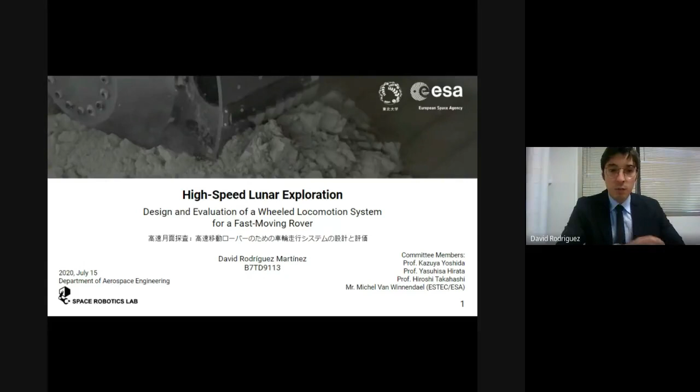For today's presentation, I'm going to start by briefly answering two questions: what and why? What are the challenges associated with lunar locomotion, and why is increasing speed a relevant problem to solve for robotic exploration of the moon? Then I'll explain what we know about faster off-road locomotion, both here on Earth and on the moon. This broad introduction will allow me to present the highlights of my work in the two main areas comprising locomotion, which are traction, that will be chapter 3, and suspension performance in chapter 4.

Using all this experience and these new findings, in chapter 5 I'll present the design of a new rover prototype intended for faster lunar mobility studies. I'll end this presentation with a summary of the main contributions of my work to the topic of rapid lunar locomotion.

So let's start with what's the problem with lunar mobility and why we need robots capable of moving faster. If we strip the tasks a planetary robot or rover has to perform down to the very basic, it would be to get from point A, usually a lander, to point B. Now yes, there are many experiments to be conducted and measurements that need to be recorded in between those two points, but really there will be no mission for these robotic scientists without the capacity to travel.

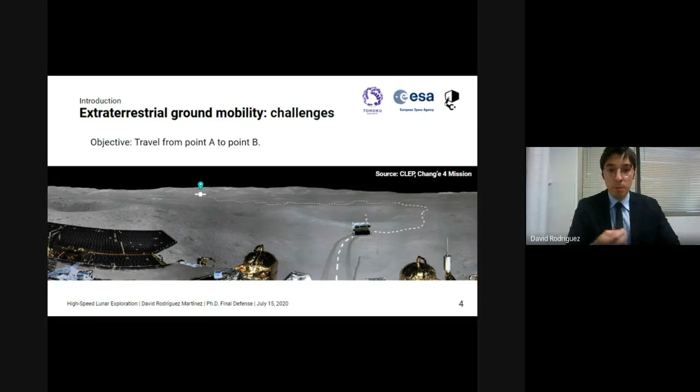And it is exactly in this apparently mundane task where some of the most challenging problems lie. My goal for this project has been to understand the effects of moving from A to B at speeds that approach 1 meter per second, and to develop solutions to make that journey possible, successful, and safe. For that, I needed to understand the effects of increasing speed on the two aspects I mentioned before: traction and suspension performance. But why is this type of study a challenge?

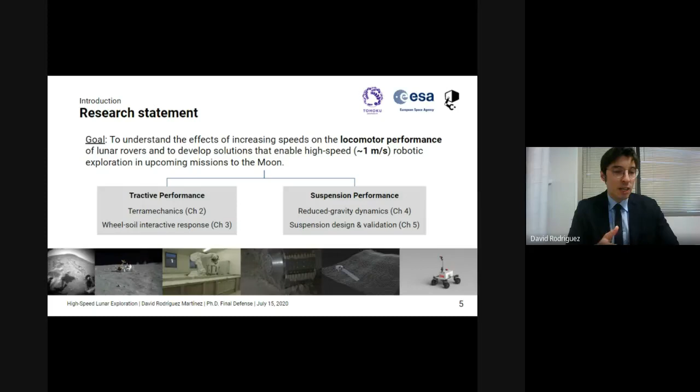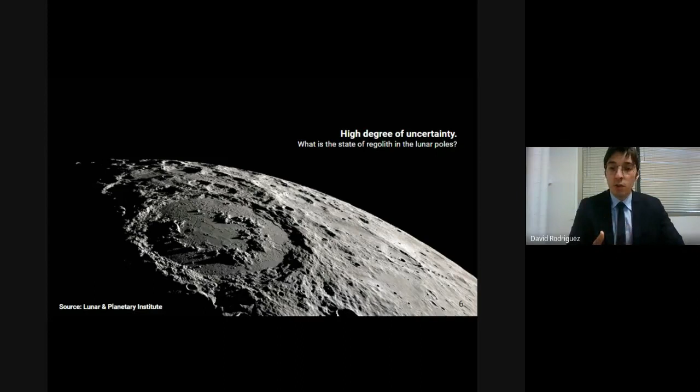Well, I've identified 3 main reasons why that's the case. The first is that exploration is by nature characterized by a high degree of uncertainty. In the case of the moon, for instance, information is quite asymmetric or non-homogeneous. We don't know whether the state of polar regolith, for example, would resemble that of the equator, given the lower temperatures and less severe thermal cycles of high-latitude regions.

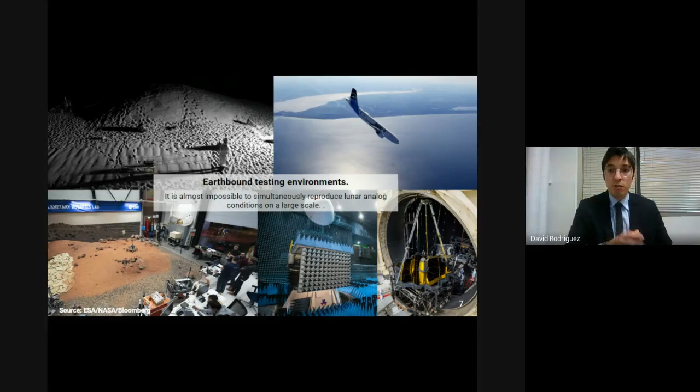The second reason lies in the impossibility to simultaneously reproduce and test on Earth the full scale of environmental conditions robots will experience during a mission. This is particularly relevant for high-speed locomotion, since the gravity scaling technique used to test planetary rovers here on Earth, by which lunar weight is simulated by degrading the mass of engineering models, cannot be used once inertial effects and dynamics start to dominate the behavior. So verification and validation across different gravity fields prior to a mission becomes increasingly difficult.

This brings me to the third problem associated with extraterrestrial ground mobility, and one of the major topics of study in my work, which is the complex nature of interaction with soils. I'm sure you've seen this sequence of images many times of NASA's Spirit rover desperately trying to free itself from a bank of unconsolidated sand. The challenge here is that we are still working toward the understanding that allows us as engineers to develop tools to predict the outcome of these interactions, to avoid precisely what happened to Spirit.

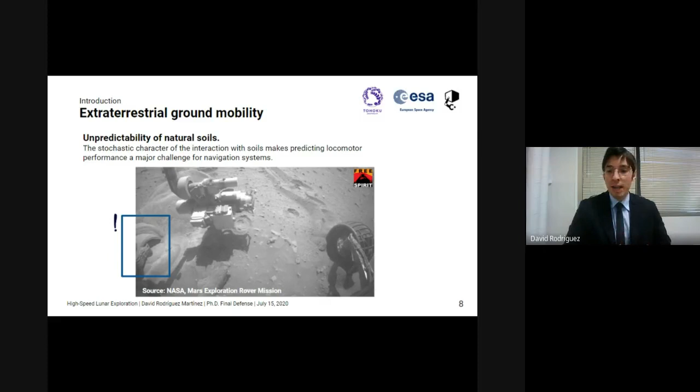So with all these constraints already present for rovers whose speeds rarely surpass 5 centimeters per second, like those on Mars, why consider developing robotic systems capable of traveling 20 to 100 times faster in an environment like the moon, where gravity is just a sixth of Earth's?

But why is that? Well, the lunar poles have become the most sought-after regions of the moon by governments and private corporations, due to their scientific value and the potential richness of their resources, primarily water ice and other volatile compounds.

In the poles, the sun barely rises above the horizon due to the low obliquity of the moon, making illumination conditions very challenging for navigation systems. Also, in some of these regions, the window of exploration is linked to just 7 days of sunlight per month, and there is a high percentage of areas kept in complete darkness, what we call PSRs, or permanently shadowed regions, where a higher amount of these valuable compounds are expected to be found or trapped.

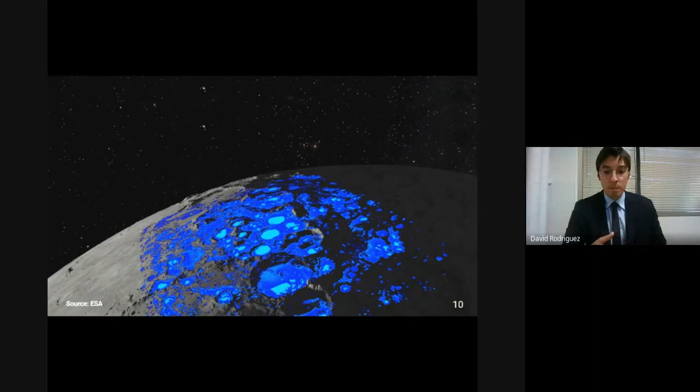So if we combine shorter days, the lack of sunlight, and longer traverses like this 37-kilometer journey, with two particular goals: one, the maximization of the return on investment for the mission, be it scientific or commercial, and two, the avoidance of heavy nuclear decay units—then faster locomotion becomes a potential enabler for these missions, getting in and out of shaded areas and simply getting to those sampling points as fast as you can, so that more time can be devoted to the science.

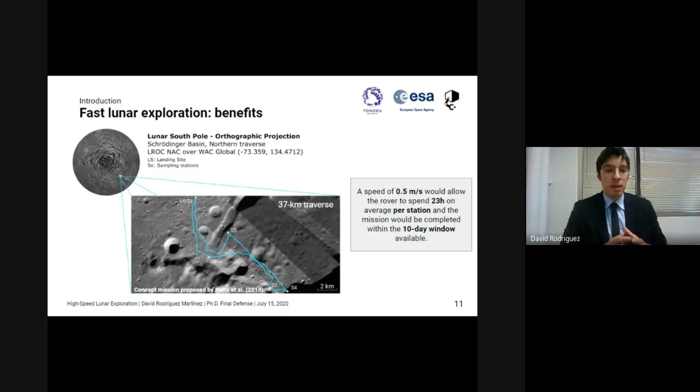In this study in particular, the authors estimated that a speed of at least 50 centimeters per second would be necessary for the mission to be completed within the 10-day window available, while allowing enough time for the scientific task to be conducted at each sampling point.

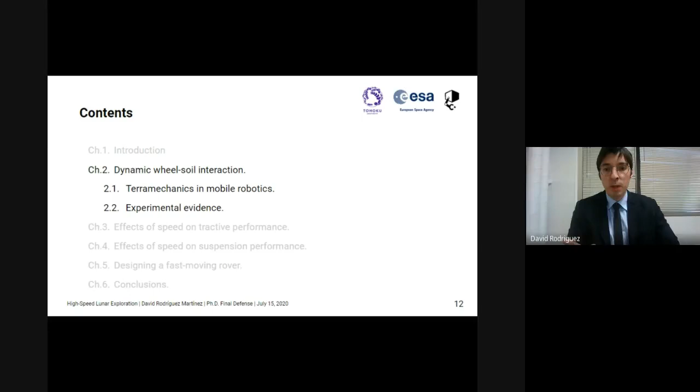So now that we have an idea of the challenges lunar locomotion studies face, and why upcoming missions, specifically those targeted at the poles of the moon, may require faster rovers, the next aspect we need to look at is: what do we know exactly about what it takes to move faster on the moon? It is imperative that we first turn our attention to terramechanics.

Terramechanics is the branch of science devoted to the study of the interaction of vehicles and machines with soils. One of the theories most widely used within the realm of off-road locomotion has come to be known as the Bekker method. It's a simplified, closed-form, semi-empirical model used to predict the vertical loads acting on the soil as a result of the movement of a large wheel.

This model has been expanded by many authors, including Wong and Reece, giving rise to the two equations you see on screen: the pressure-sinkage and the shear stress-strain relationship. The important thing I'd like to focus on here is not necessarily the equations, but the fact that this theory, initially meant for tanks and big military trucks driven across muddy ground, has now been applied to planetary robots orders of magnitude smaller, lighter, and slower, operating on soils with close to no, as far as we know, organic matter.

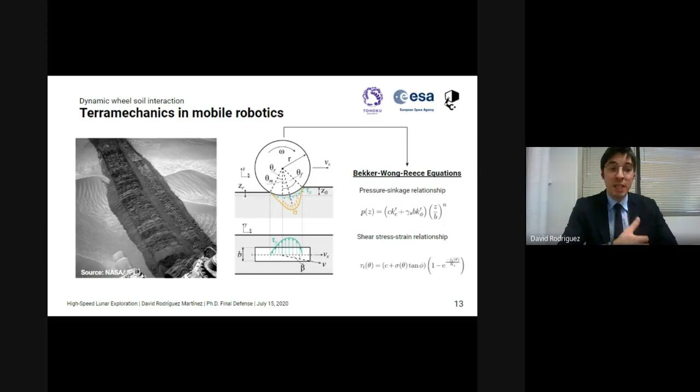So predictions through these equations are not necessarily our best chance at understanding the problem and predicting the outcome of robotic mobility and lunar locomotion.

Some of the most important limitations of Bekker-based models include the lack of information as to the physics taking place in the interaction with soils, and the need to perform an experimental characterization of the state and properties of the soil on which the rover will ultimately operate. As you can imagine, this dependency on empirical data hinders the validation of these models, particularly in the case of planetary exploration, where data is often scarcely available.

Also, its bidimensional representation and the oversimplification of the wheel geometry and terrain is a big limitation. But for our case, the biggest disadvantage imposed by the use of Bekker-based equations resides in their inability to account for dynamic effects. We know already, from studies conducted in the field of soil mechanics, that pressure and sinkage are affected by the rate of penetration—they are affected by dynamic effects.

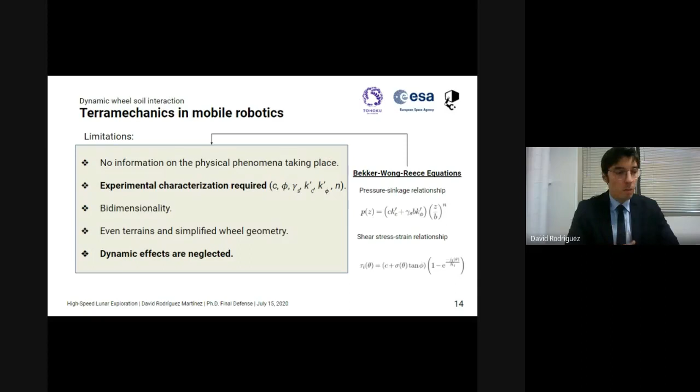The Bekker model, and those based on it, assume the interactions of wheels and soft ground occur under quasi-static, steady-state conditions, making these equations independent of the potential effects caused by soil strain rates, inertial effects, or transient operations. But what about evidence from previous missions to the moon?

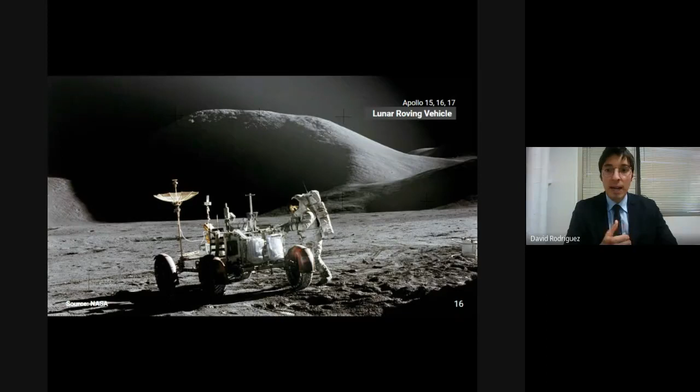We've already been to the moon with rovers way faster than today's Martian rovers. Two missions, the Soviet Luna 17 and 21, featured Lunokhod 1 and Lunokhod 2, a pair of 800-kilogram, 8-wheel rovers remotely operated from Earth with a top speed of 50 centimeters per second. And of course, the last three Apollo missions featured the well-known lunar roving vehicle, a piloted lunar vehicle capable of traveling at speeds of up to 5 meters per second.

Unfortunately, neither of these two vehicles carried sufficient telemetry on board for us to derive definite conclusions as to the performance of these vehicles when moving faster under lunar conditions.

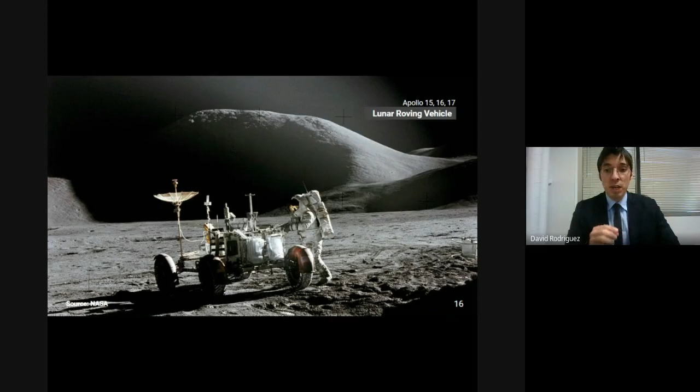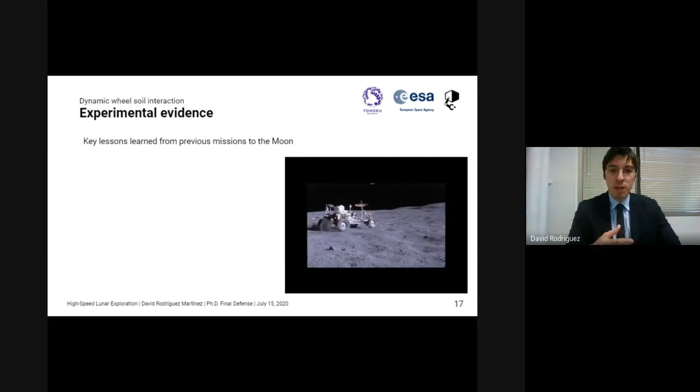By looking at the footage and closely examining the post-mission reports, we can extract some key lessons. One of the first things that becomes evident from the Apollo footage, and which the crew remarked on in their reports, is the tendency of the suspension to constantly bounce. These instabilities became prominent at higher speeds, preventing astronauts from driving above 2.8 meters per second, with the wheels reported to consistently lose contact with the ground above 1.4. This excessive bouncing decreased traction, reduced stability on slopes, and diminished the capacity to brake and turn, with braking distances almost twice those required on Earth.

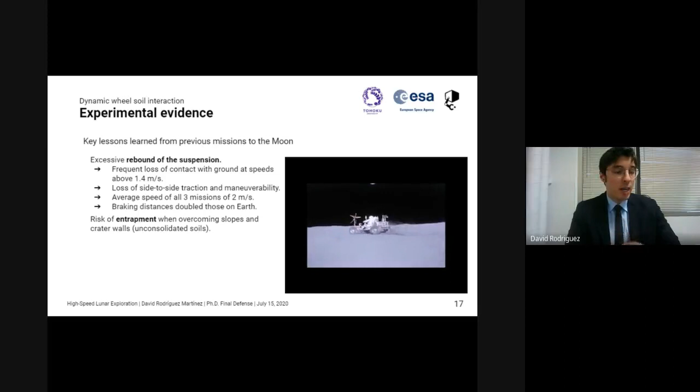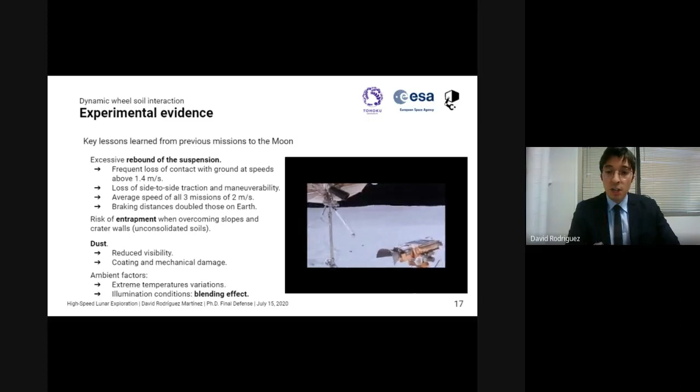All of this limited the average speed of the three missions to about 2 meters per second. As with unconsolidated Martian soils, wheel entrapment was also a major concern, primarily when overcoming slopes. Other aspects, less relevant to our studies but equally important, were dust and ambient lunar factors: freezing temperatures, harsh illumination conditions, and the lack of contrast and blending of the horizon with surrounding obstacles, which made operating these vehicles at high speed ever more complex.

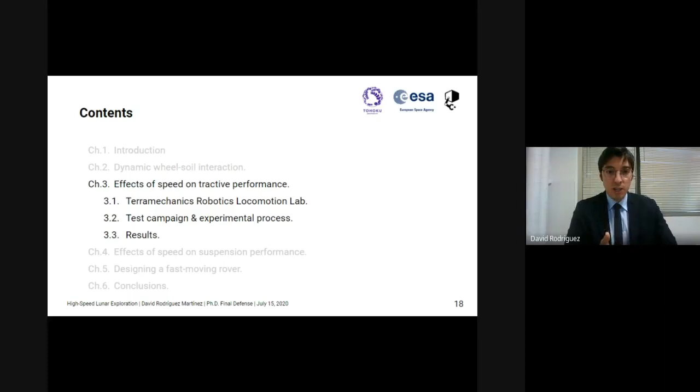In light of the inconclusive evidence on the locomotor performance of planetary robots operating at higher speeds, the first thing I tried to understand was how speed affects traction. For this part, I had two main objectives. First, I wanted to understand how speed was affecting tractive performance metrics, namely rover pull, wheel sinkage, and tractive efficiency.

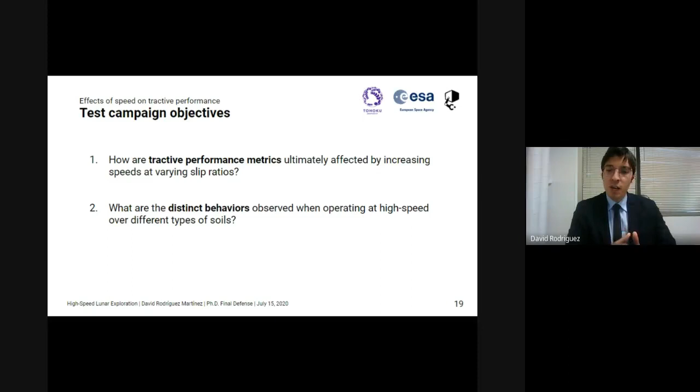Second, I wanted to obtain numerical and visual proof of the variations in the dynamic interactive behavior when operating over different types of soils.

To conduct these experiments at speeds up to 1 meter per second, I partnered with the Institute of System Dynamics and Control of the German Aerospace Center, where there is an ambient-controlled automated facility called the Terramechanics Robotics Locomotion Lab. This facility, unlike conventional single-wheel testbeds, makes use of an industrial robotic arm and an extensive sensor suite, which we used to constantly monitor the performance of the wheel over a run distance of 3 meters.

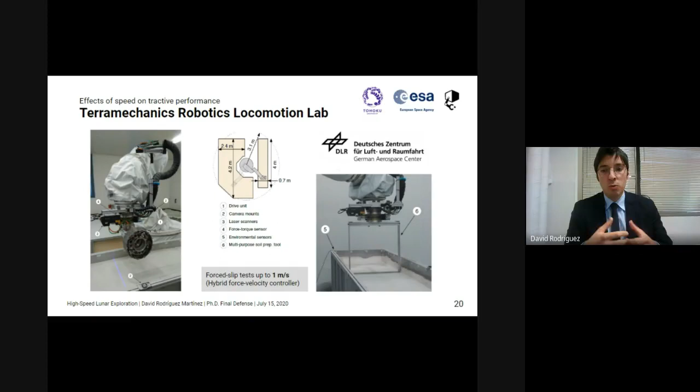A hybrid controller was used to vertically impose the required wheel load and to control the speed of the robotic arm longitudinally, allowing us to recreate varied slip conditions. Here you can see the two end effectors we used. The one on the left contained the drivetrain, which is what we used to operate the wheel, and the second one on the right was used to condition the ground before every experiment.

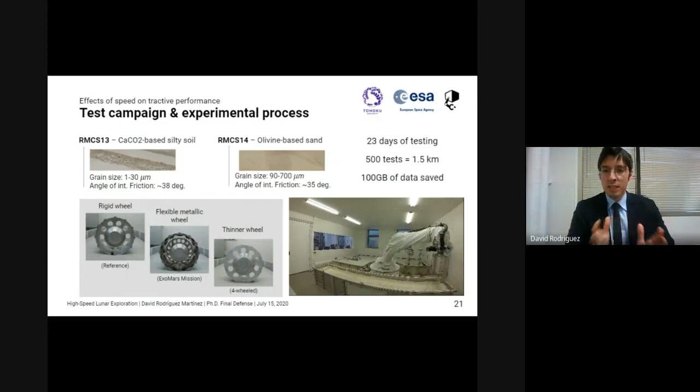We conducted 500 different tests, collecting, as far as I know, one of the most extensive data sets that exist to this day on the effects of speed on tractive performance for non-pneumatic wheels. We operated different types of wheels commonly used by planetary rovers over two different types of soils. For most tests, we used a cohesionless olivine-based sand, codenamed RMCS 14, and we also tested performance over a more challenging soil named RMCS 13, a calcite-based silty soil, very fine-grained, soft, and slightly cohesive.

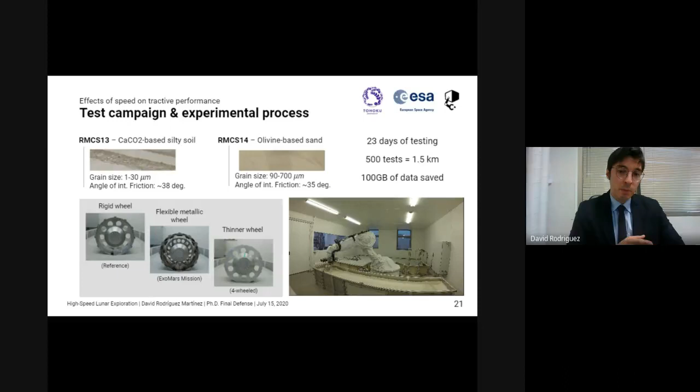For every case study, the speeds tested went from 1 centimeter per second to 1 meter per second, and these were all forced slip tests. For all of them, we used a wheel load of 100 newtons.

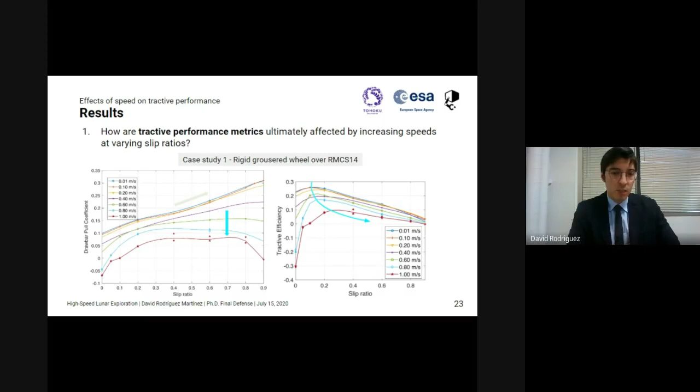The second interesting observation, if we look now to the right side graph, is the tendency of the slip ratio at which maximum efficiency was reached to increase with increasing speeds. At low speeds, maximum efficiency was often reached at 10% slip, whereas at 1 meter per second, the maximum efficiency was recorded to be reached at almost 30%.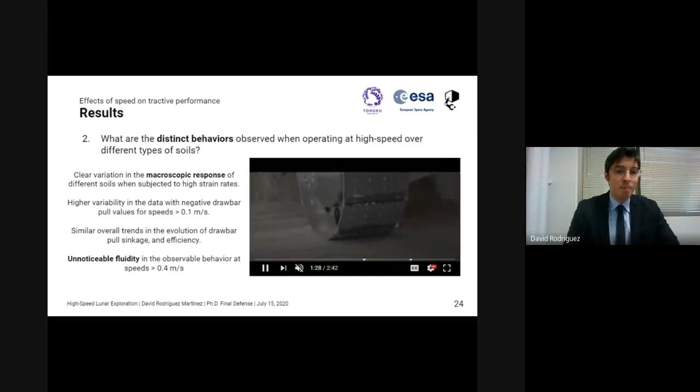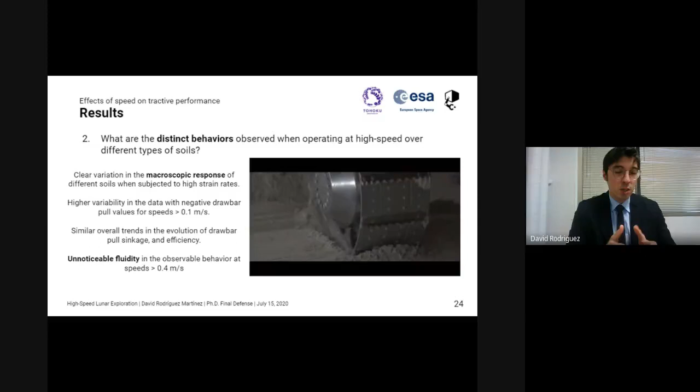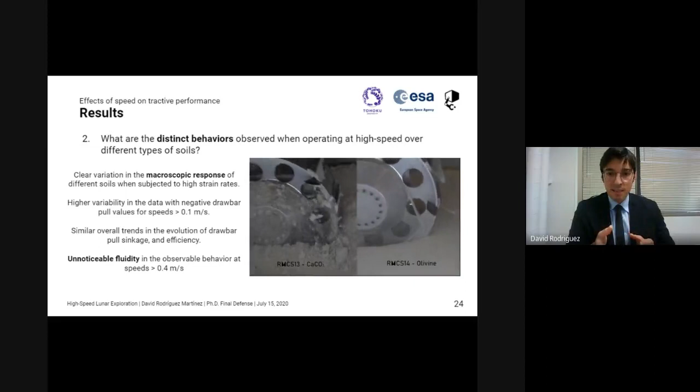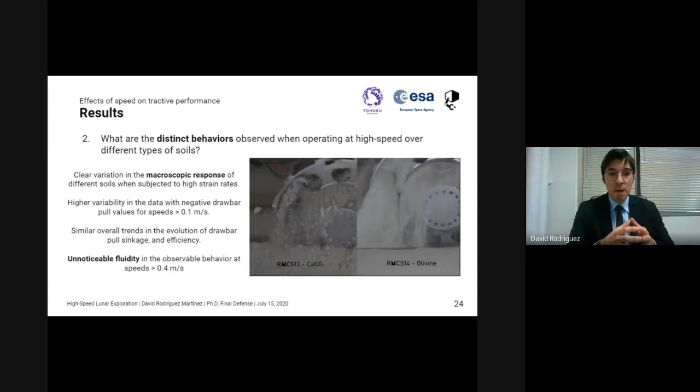With regards to the variations in the dynamic interactive behavior, it was much harder to manipulate and drive over the finer and slightly cohesive calcite soil, which is the one you can see in the video now. Above 10 centimeters per second, we experienced almost a complete loss of traction due to the low bearing capacity of the soil. As you will see in a few seconds, the macroscopic behavior of the different soils we used show clear variations. The olivine-based sand, on the right side of the video, displayed an increased fluidity when subjected to high strain rates, something that was not observed in the calcite, with bulldozing effects being much more predominant in this second case, as you can see here.

And lastly, the flexible wheel displayed the best performance along the full range of velocities. Measurements recorded at 1 meter per second with the flexible metallic wheel displayed over 2 times higher drawbar pull and tractive efficiency, and about 18% lower sinkage at 20% slip, compared to a rigid wheel of similar characteristics.

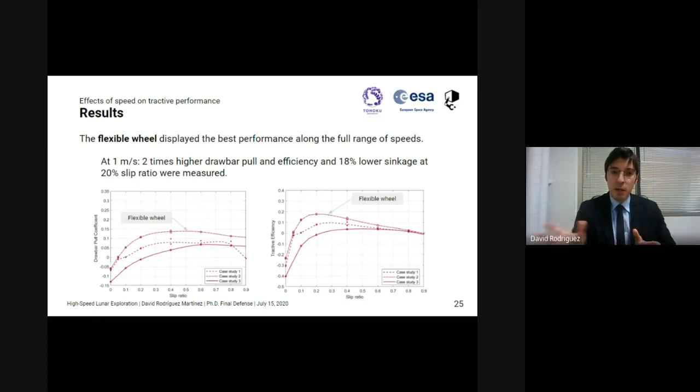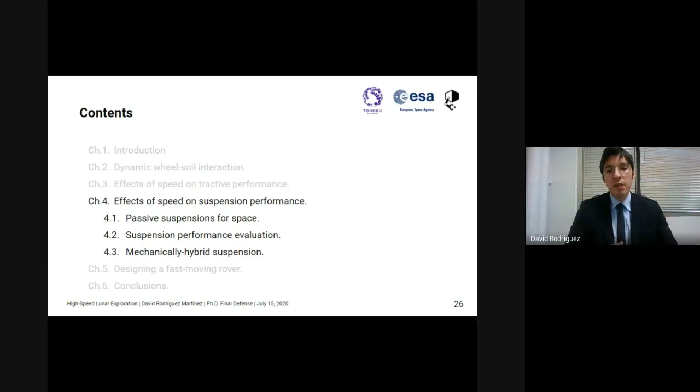So once I understood how speed played a role in the tractive performance of rovers operating up to 1 meter per second, the second aspect I was interested in was the effects of speed on the suspension performance. The core premise for an optimal suspension design in planetary robotics is that it has to be mechanically simple and potentially passive. Most planetary rovers make use of a passive free-balancing suspension configuration similar to this one.

This is called the rocker bogie suspension, initially designed by NASA for Sojourner during the Mars Pathfinder mission, although Sojourner had it reversed, with the bogie in the front.

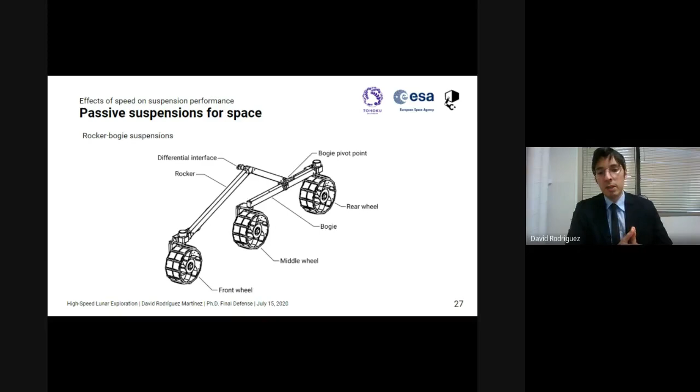The simplicity of passive suspensions becomes almost a necessity in space, given the limited volume and power budget of space activities. The dependability of these suspensions makes them great for obstacle negotiation, terrain compliance, and vehicle stability at very low speeds, but not so much for mitigating impact loads and vibrations and maintaining proper stability of the rover at higher speeds.

So in order to understand the limitations of passive suspensions when applied to smaller four-wheel rovers operating at higher speeds, I needed to turn to multi-body dynamic simulations, where in combination with high-fidelity physics engines, I could actually observe and monitor the dynamics under a virtually simulated 1G environment.

To develop the different modules that I required for my research, I decided to make use of a commercial software called Virtual Robot Experimentation Platform, or VREP, although recently it has been renamed CoppeliaSim, in combination with the dynamic physics engine Vortex.

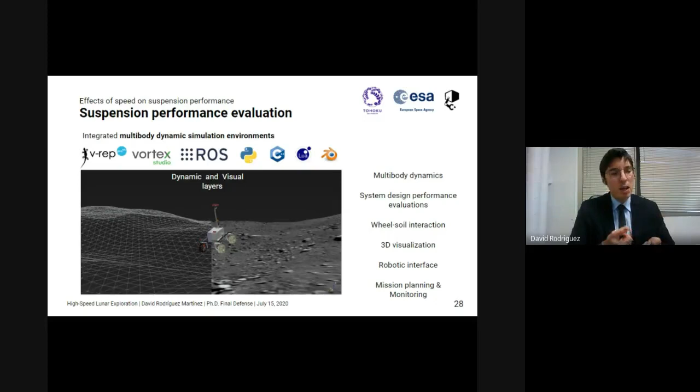So using this platform as a baseline, I developed four different simulation modules to simulate extreme situations the lunar rover will encounter once on the moon. This included traveling at 1 meter per second when overcoming large rocks, climbing steep slopes, or suddenly encountering an outcrop.

To simulate the frictional character of lunar regolith, which is often the most complicated part to simulate accurately, I opted for a simple Coulomb friction model with an isotropic friction coefficient of 0.4 for the interaction between the wheels and the soil. This provided a range of slip ratios between 5 and 35% for these situations. I knew this was an oversimplification of the real situation, but it was a trade-off I needed to make in favor of shorter turnaround times in the simulations, also knowing that I would compare all the different models against the same simplified baseline.

And then what I did is model a multi-body dynamic system of a rover we had in our lab at the time called Eldorado 2, which is the rover you can see in these images, a 4-wheel, 19-kilogram rover with passive rocker arms and rigid wheels.

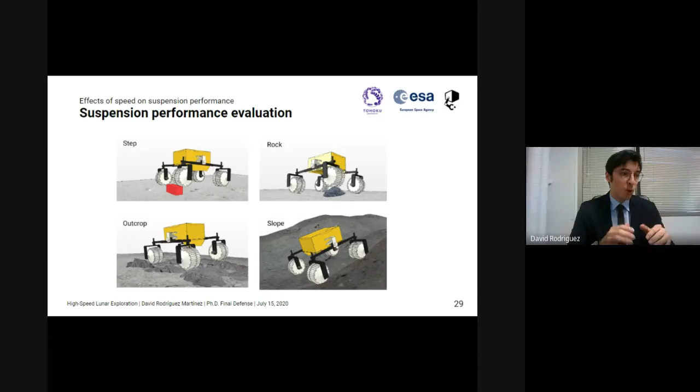So what I wanted to observe was the variation in performance when energy dissipation devices, in this case passive springs and dampers, were introduced in the design under different suspension configurations. Using the same mass distribution, sizes, and suspension layout, I defined 3 different configurations.

A conventional dependent rigid configuration, which simulated the use of free balancing rocker arms. An independent elastic configuration, in which the rolling of the rocker was locked and a spring damper system was introduced between the wheel hub and the end of the rocker arms. This configuration simulated the double wishbone we use sometimes in ground vehicles here on Earth.

Lastly, I devised a new configuration in which the previous 2 were combined into what I named mechanically hybrid suspensions. The performance was evaluated in terms of success in overcoming the obstacle or the slope, maximum vertical load to the suspension arms, and maximum vertical accelerations measured in the chassis.

Unfortunately, I don't have enough time to go over every single case. I'm going to showcase one of the most extreme cases, which was suddenly confronting an outcrop at 1 meter per second. So if we pay attention to the videos on the right side, you can see the violence of the situation.

When we simply use conventional rocker arms, the wheels lose contact with the ground, and we almost completely lose control of the rover trajectory. There is a high risk of damage, not only of the wheels and the suspension arms, but also of the electronics and the optics housed inside the main body of the rover.

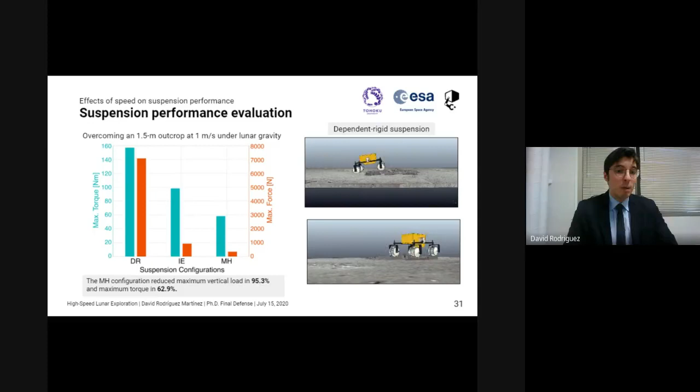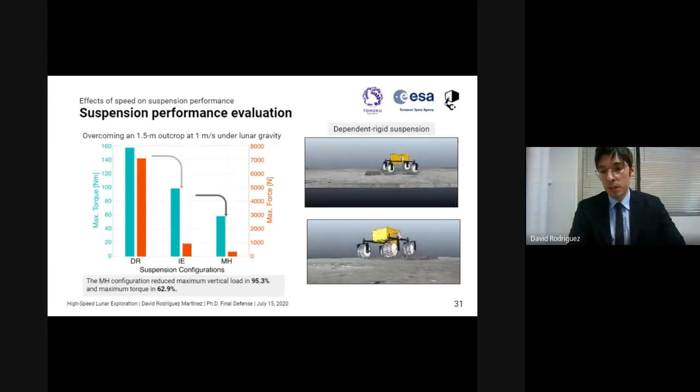If we look now at the graph on the left side, simply by adding springs and dampers we already substantially decrease the effects of impact loads. But if on top of that we introduce a dependency with the MH configuration, we achieved a 95% reduction in maximum vertical loads and almost 63% reduction in torque when compared to the dependent rigid case. And here you can see the difference.

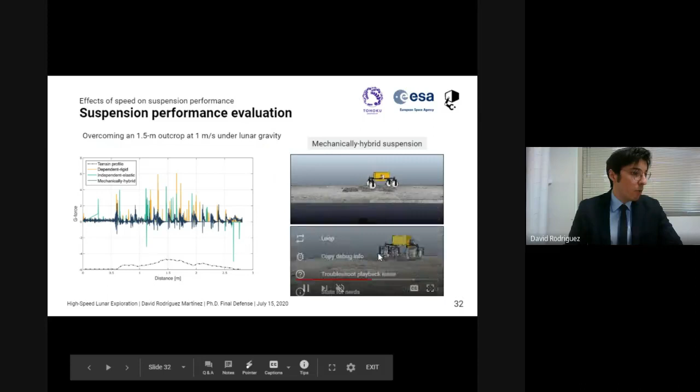Unfortunately, I cannot loop the video on the bottom part, I'll click it a few times. So now it's playing the case of the mechanically hybrid suspension configuration under the same exact conditions. As you can see, much less movement of the rocker arms can be observed, together with an overall gain of stability in the motion profile of the chassis and in the trajectory.

On the left side, we can see the recordings of the IMU placed inside the body of the rover. And here as well, we can see a significant mitigation of the vibrations.

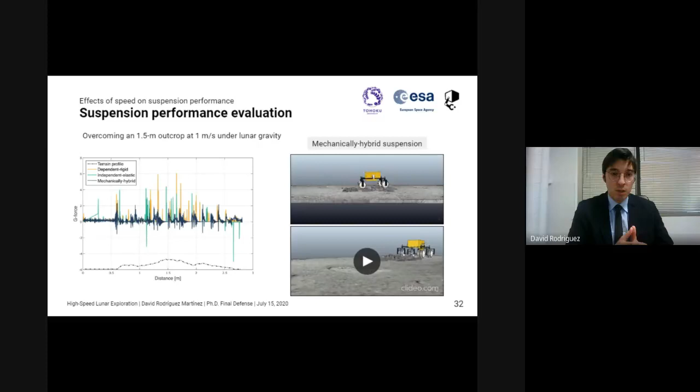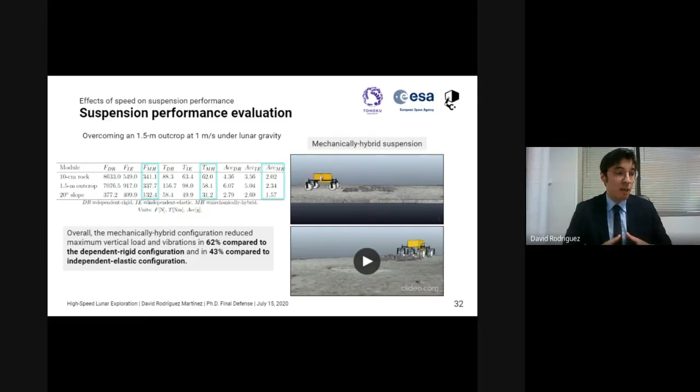Here we have a table that gathers all the results from all the different cases. The mechanically hybrid configuration successfully reduced the detrimental effects of an irregular terrain by 62% compared to the dependent rigid and 43% compared to the independent elastic configuration.

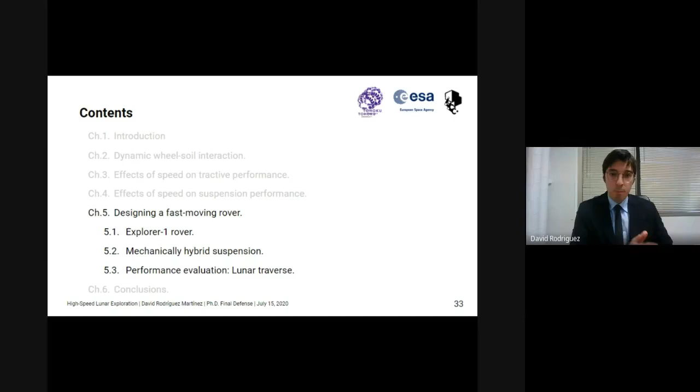So with everything we learned so far about what is required to travel faster while guaranteeing safety and good performance of the rover, we decided to design a new rover prototype that makes use of this type of chassis configuration, and we called it Explorer 1.

Based on the chassis of the old Eldorado 2 platform, Explorer 1 was designed as a teleoperated 23-kilogram rover, drivable at speeds up to 1 meter per second. It has 4 independently driven and steerable 20-centimeter wheels. We also equipped the rover with 2 onboard computers, navigation cameras, and a LiDAR so that future students can work on increasing its levels of autonomy.

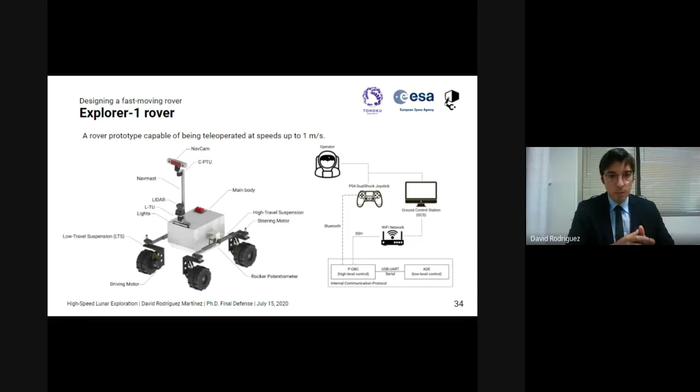And it has a suspension system that is based on the principles of the mechanically hybrid configuration. So the mechanically hybrid configuration was realized by reusing the old rocker arms from the older platform, which provided a large travel range of about 250 millimeters.

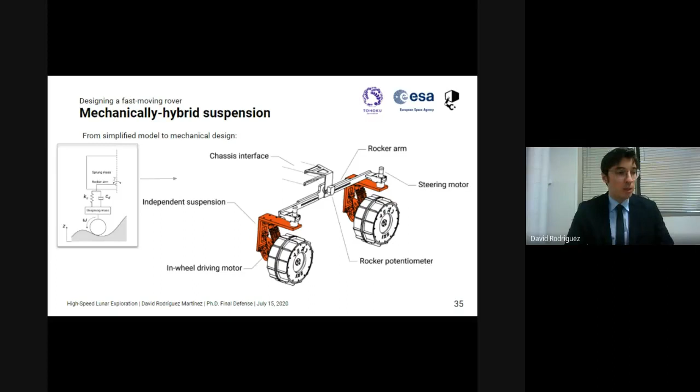Attached at both ends, we included independent double control arm elastic suspensions, providing an additional compliant travel range to the wheel of about 35 millimeters. Here is a detailed schematic of the elastic part of the suspension. 2 control arms were used to maintain constant camber angle during wheel travel. In addition, we added the possibility for the dampers to slightly change their position with different mounting points, so that in this case the stiffness of the lower travel range of the suspension could be further tuned.

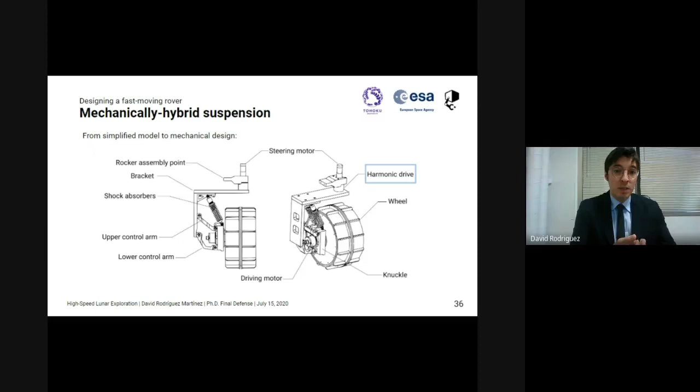And we used the harmonic drive of the steering motors as the connecting part between the rocker arms and the elastic suspension. As I remarked in the thesis, this configuration favors the modularity of the design. It's very easy to adapt this particular configuration to a 6 or an 8-wheel chassis, and also even to adapt it to stowable configurations by the addition of deployable motors.

So then what I did is I developed a dynamic model of this design in CoppeliaSim using the same framework as before. I conducted a simulated performance evaluation under lunar gravity, which you can find thoroughly explained in the thesis. In addition, as a case study, I developed a virtually simulated lunar mission, which I'm about to present, consisting of a 20 by 15 meter virtual lunar environment where the rover was commanded to follow an 18-meter traverse formed by 4 stages.

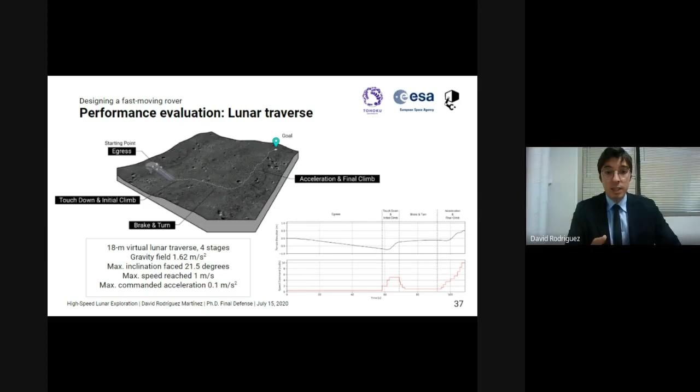The first part of the mission was the rover needed to egress from a hypothetical lander, just like any real mission. This was done through 3-meter ramps deployed at 15 degrees. The commanded speed here was just 5 centimeters per second to ensure safety of both the rover and the lander.

The second stage starts the moment the front wheels touch down on the ground. Touch down follows a 16.5-degree incline, while the rover was commanded to accelerate up to 50 centimeters per second. You will see that in a second. Because of this, at the summit, the front wheels briefly lose contact with the ground for about 1.3 seconds, incurring the highest acceleration experienced by the chassis of 0.46 Gs.

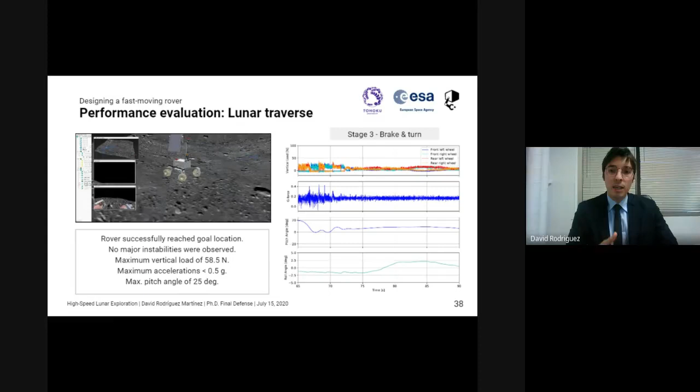Following the initial climb, the driving motors were commanded to suddenly brake and slow down at 10 centimeters per second, and the steering motors were commanded to make a 90-degree turn to the left. Here we use a simple double Ackermann steering control.

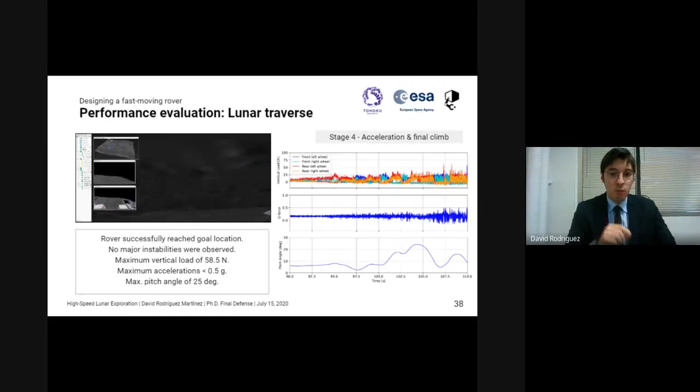Once the cornering maneuver is completed, the rover is commanded to face the most challenging part of the mission, which is an extreme 9-meter climb reaching top speed of 1 meter per second at the top over a highly irregular terrain, which has a maximum inclination of 21.5 degrees.

As you could see, some of these situations, like heading toward the steeper incline at top speed, comprise quite an unlikely scenario for a fast-moving rover operating on the moon on a real mission. But even under these conditions, the rover suspension was capable of maintaining the body stable, helping the rover reach the goal and successfully accomplishing the mission.

The maximum vertical load recorded on the suspension was 58.5 newtons, and vertical accelerations were maintained always below 0.5 Gs.

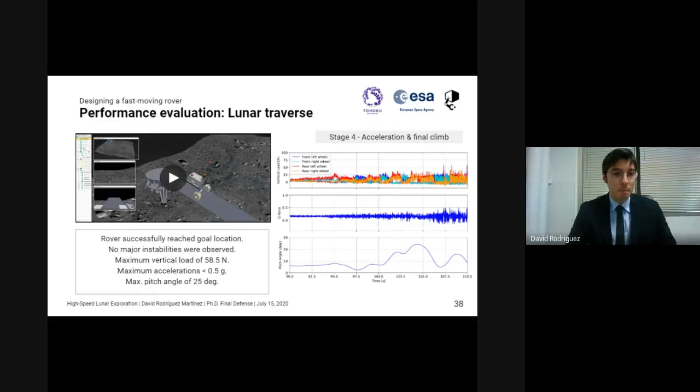Despite the successful outcome of the simulation performance evaluation, a potential improvement of the current design would be the combination of the mechanically hybrid suspension with compliant wheels. On one side, the dependent part of the suspension efficiently distributes the weight among the different wheels, increasing stability, particularly at lower traveling velocities, and providing the high travel range necessary to negotiate large obstacles.

Then an extra degree of compliance is achieved by the use of independent springs and dampers. These provide each wheel with a lower passively controlled travel range designed to attenuate vibrations and mitigate the detrimental effects of shocks and impacts while isolating the chassis.

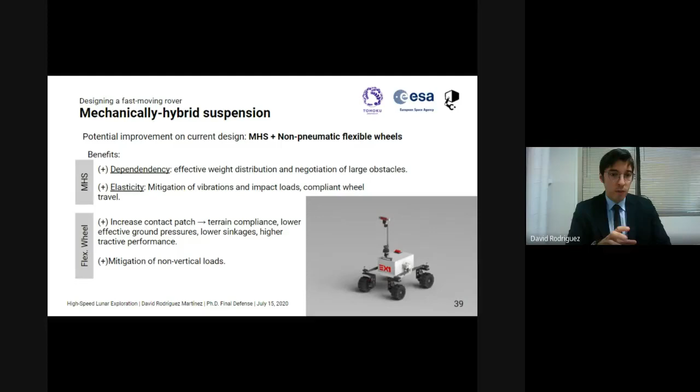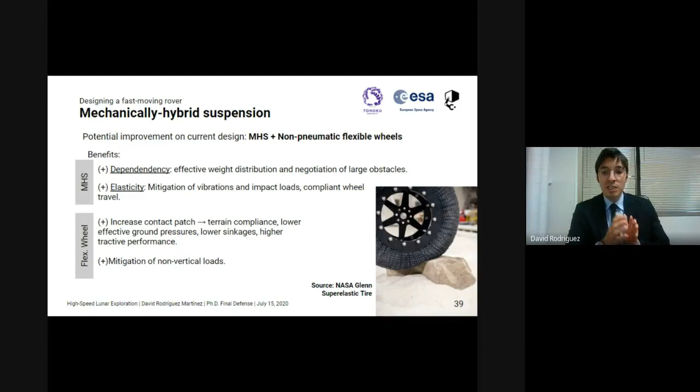If on top of all this we add flexible wheels, this could potentially improve the performance in at least two ways. One, flexible wheels provide a larger contact area, adapting it to the irregularities of the terrain, which diminishes effective ground pressures, decreasing wheel sinkage and significantly improving tractive performance, as we already saw in chapter 3. Secondly, the flexible wheels have the capacity to mitigate non-vertical loads, such as those inflicted on the wheels during the first instances of negotiating a very large obstacle.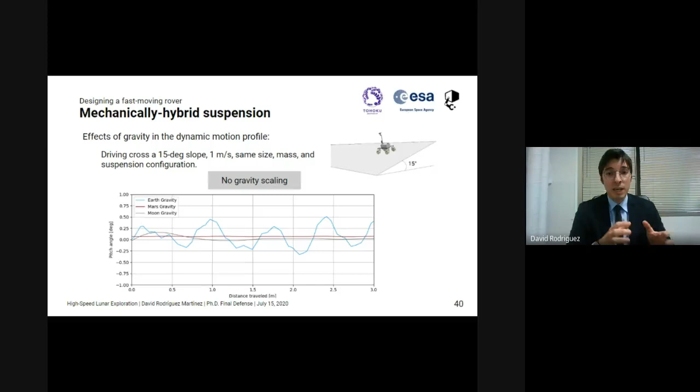So in order to approach testing on Earth, we have several options. One would be to offload gravity, creating a counteracting vertical force. It would be the best option for simulated dynamics, but it has the downside of being limited in size and distance traveled. Another potential solution would be to scale the testing model of the rover or its suspension configuration based on dynamic scaling principles.

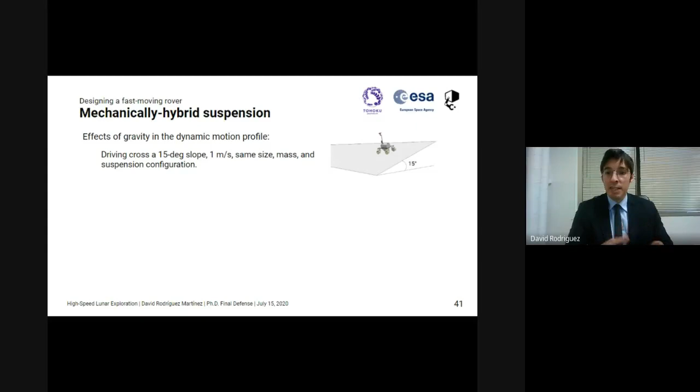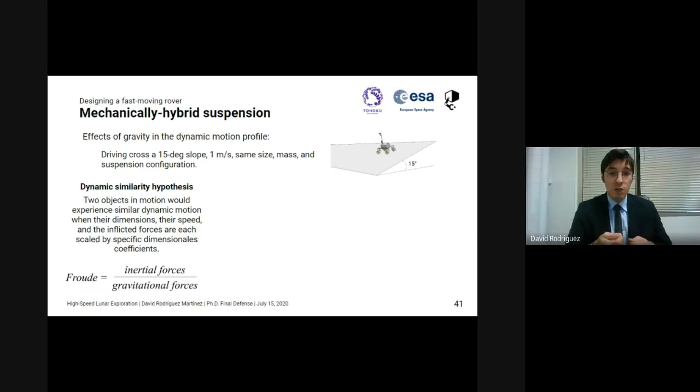One example of those would be the use of the dynamic similarity hypothesis, so that the motion of both the rover on the moon and the model on Earth experience a similar ratio of inertial forces to gravitational forces. This is what's called the Froude number.

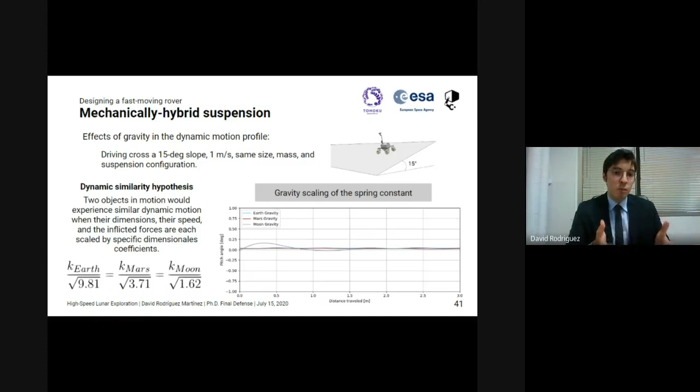If this dynamic scaling method is applied, for instance, to the harmonic motion of the springs of the suspension, without necessarily changing anything else and neglecting the nonlinearities within the system, the motion profile that we obtain becomes much similar to that of the moon, of the real rover on the moon. Although in this case, inflicted forces would vary.

So to end this presentation, I would like to address the main contributions of my work and key milestones achieved throughout this project. The prime objective of this project was to shed light on the potential application of high-speed mobility to future lunar missions.

So the first thing I established was a collaborative framework. I was very fortunate to count with the support of the European Space Agency and the German Aerospace Center, collaborations that would not have been possible without the support of Tohoku University's GPMEC program. So together, initially, we drafted the needs and objectives for this project.

Then I examined the body of knowledge available at the start of the project with regards to off-road locomotion performance, both here on Earth and also for previous moon missions, and realized that the existing evidence was far from being conclusive. So as a consequence, my first objective was to conduct my own experimental evaluation on the evolution of tractive performance metrics with speed, within conditions that better represented those of planetary robots.

This resulted in a set of recommendations and guiding principles to maximize performance under high-speed conditions. Some of the most relevant findings include the degradation of performance for speeds above 20 centimeters per second. This may be due to a transition in the physical phenomena dominating the interaction between the wheel and the soil. Although this varied depending on the soil we used, the slip ratio with maximum efficiency appeared to increase with increasing velocities.

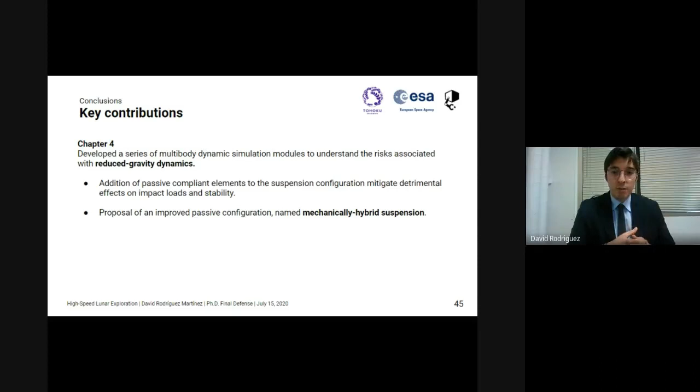This resulted in the proposal of a novel configuration named mechanically hybrid suspension configurations, which appeared to outperform, based on the simulation results, more traditional passive configurations under a variety of scenarios. Lastly, the principles behind this new configuration were then translated into the mechanical concept design of a new 4-wheel lunar rover that we named Explorer 1.

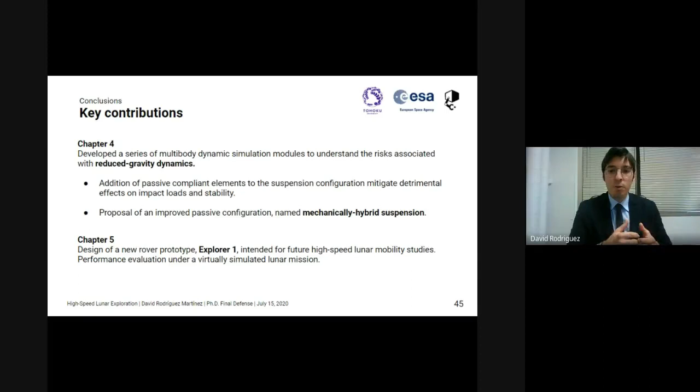I also addressed the possibilities of combining the MH configuration with flexible wheels and potential solutions to the gravity scaling problem. As a final case study, I characterized the performance of this new suspension design under a virtually simulated lunar mission, in which the rover was proven successful in accomplishing the goal and maintaining stability and good performance even under extreme terrain and operational conditions.

So that's all from my side. Thank you very much for listening, and I'll gladly take any questions you have.

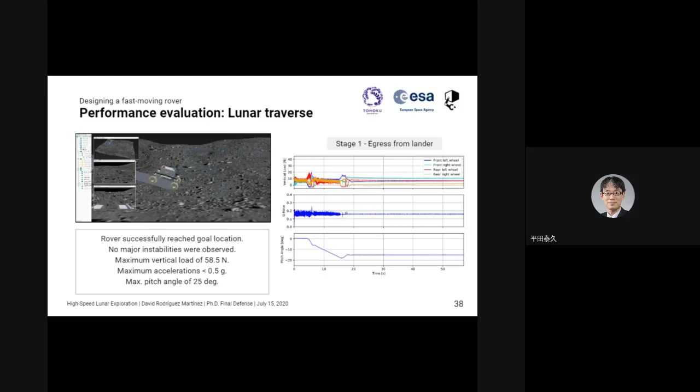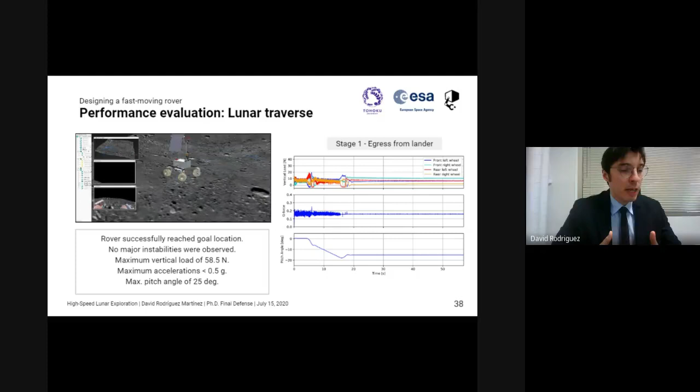So these results are output from the software. There is no real sensor used here. The vibrations may be due to two things. One is because the wheels are modeled with grousers, and the soil is not simulated as a discrete material, it's modeled as a continuum. So you get those vibrations generated by the contact of the grousers with the simulated ground.

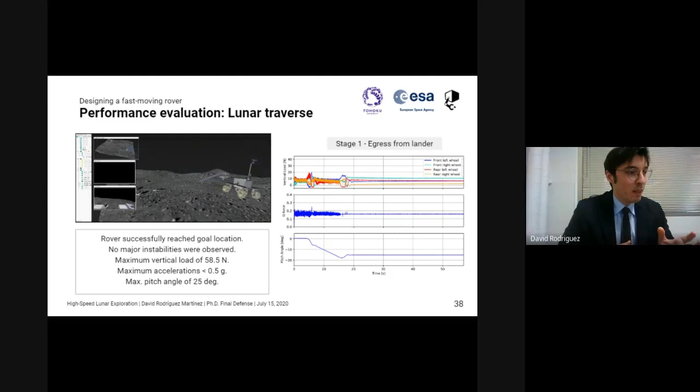And the second is just the inaccuracies that the measurements from the simulation have by nature. So that's why we see a lot of vibrations, and this is raw data - obviously unfiltered raw data. That's why we see a lot of oscillations and vibrations.

Okay, I understand that there is a grouser, so that there is a vibration.

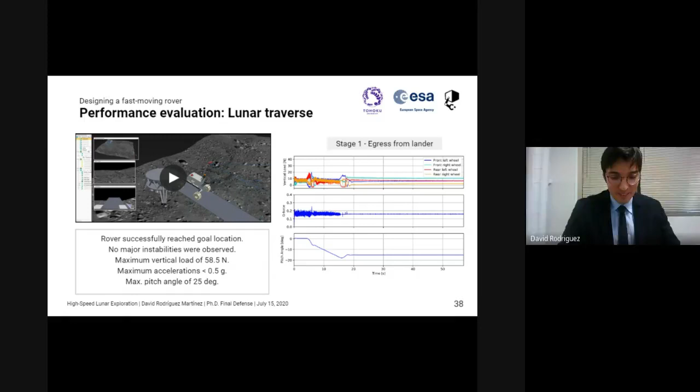I think this is a very nice simulation. In the static case, if the rover speed is very slow, we don't need to worry about the dynamic behavior of the system, but in this case we have to consider dynamic behavior. In the case of an automobile car, we have to consider vehicle stability control, for example sometimes we have to consider the drifting of the vehicle, or reduce that drifting behavior in the real vehicle. In the case of this kind of rover on the moon, do you have to consider about drifting or reducing this kind of behavior? I think you can control all the wheels so you can control more complicated motion of the vehicle. So what do you think about the future expansion of this dynamic motion control of the rover?

That's a very interesting question, and I don't have a clear answer. What I know is that it depends a lot on the characteristics of the rover. For instance, one of the lessons we learned from the Apollo missions is that they could control the position of the four wheels, so they could steer all four wheels. What they reported is that it was easier for them to reduce drift and control the vehicle when they could only use the front steering method instead of being able to control all four wheels. So that's the only clear evidence we have of what could potentially work best.

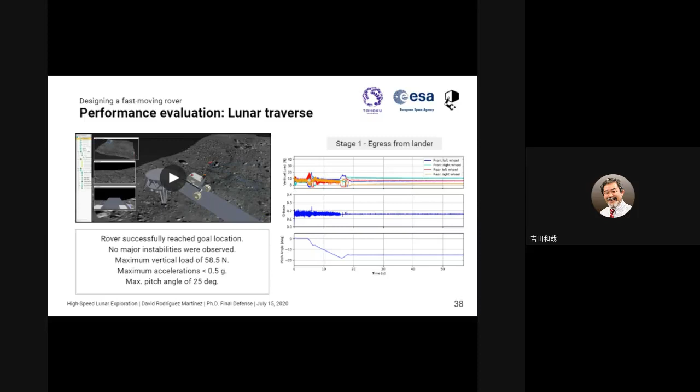Okay, thank you very much for your excellent presentation. I want to ask you a very basic question. If the vehicle speed is increased, I think there are several advantages, but on the other hand, how do you think about the disadvantages when the vehicle speed is increased?

Well, again it depends on how we frame that question. If we talk about autonomous rovers, a big disadvantage—I've looked only at locomotion, but then we have to look at navigation, and that's a completely separate problem, because your control algorithms and sample rates need to be fast enough for the rover to make decisions on its own when it's moving that fast. So that's one of the biggest disadvantages. Then the problem is that we don't really know—it's always a higher risk to move at higher speeds, because as happened with the Apollo mission, it could be that once on the moon, the side-to-side traction we have moving faster is way lower than what we expected. So those are two potential downsides. The first one I mentioned, with navigation systems not being capable of keeping up with the pace of the rover, is a big problem. Although we have solutions here on Earth with autonomous vehicles, it's a completely different story when we translate that to a limited computational and power rover. So that will be my answer to that.